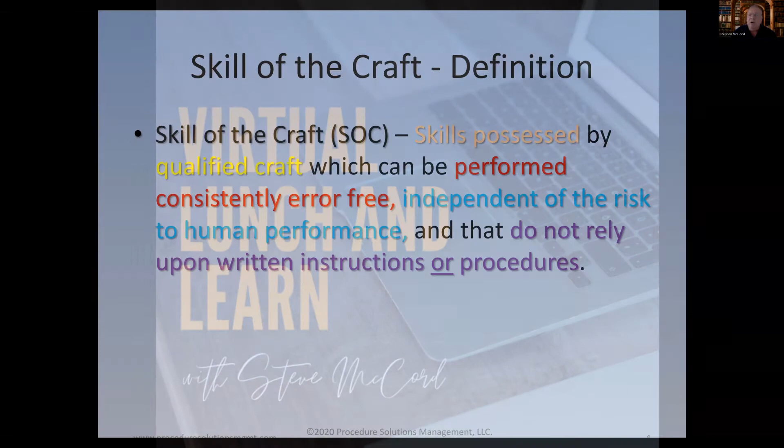We want to talk about the definition of skill of the craft. For many years in the nuclear industry, the way skill of the craft has been treated is many of the power plants in the country actually developed a skill of the craft procedure. And what they would do is they would have this huge document that lists every single task that was considered

to be skill of the craft. If you found that task in that procedure, then as a procedure writer or a job planner, you didn't have to pretty much provide the how. You could just tell them to go do that thing. And it was assumed that they would know how to go do that because it was their skill of their craft, right?

So what happened is that there's been a lot of problems in the nuclear industry with that, because if you go from power plant to power plant across the country, inspectors would look at these skill of the craft documents and they would find a lot of inconsistencies from one plant to the next. Although they all have pretty much the same training requirements and the same nuclear regulatory issues, so there was always this quandary about why is it different?

And sometimes it would be different between the same power plants that were owned by the same utility. Some utilities own multiple plants, but yet they could have a different thing from one plant to the next. So a few years ago, it was basically tasked to EPRI, the Electric Power Research Institute, and there was funding for it to actually come up with a definition for skill of the craft instead of this big book.

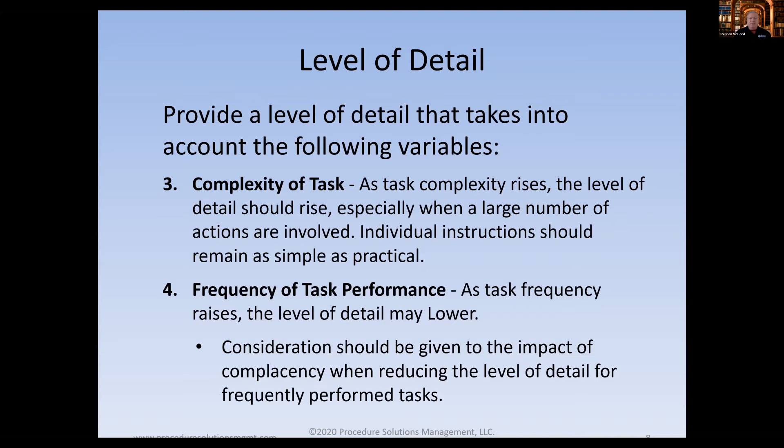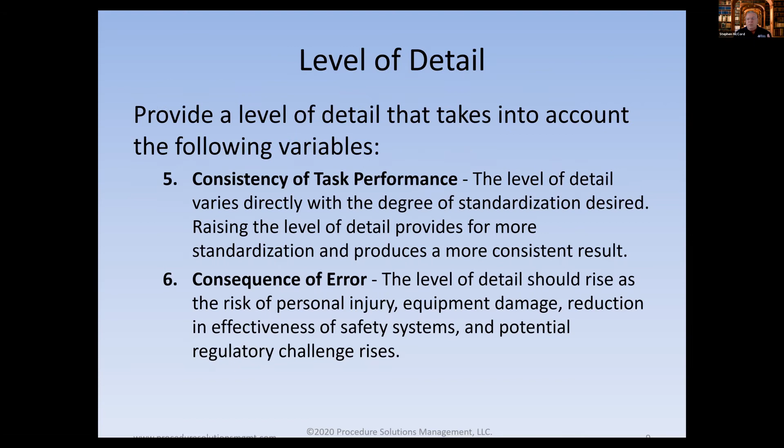And so in doing this, we really need to try to understand that when you look at skill of the craft, it's one of 6 considerations, right? I don't know how much I really impressed upon that in my classes that I teach. It's just one, right? But in of itself, skill of craft has its own definition here that is very, very important. And so it's very narrow on what you can do if you follow the industry guidance, to be able to do that.

I'm going to pause there for a second. So what we've talked about to this point is the definition of skill of the craft. And then what I tried to do is frame it so you could see where skill of the craft factors in with the 6 considerations that you need to take when you're trying to figure out, do I tell someone what to do or how?

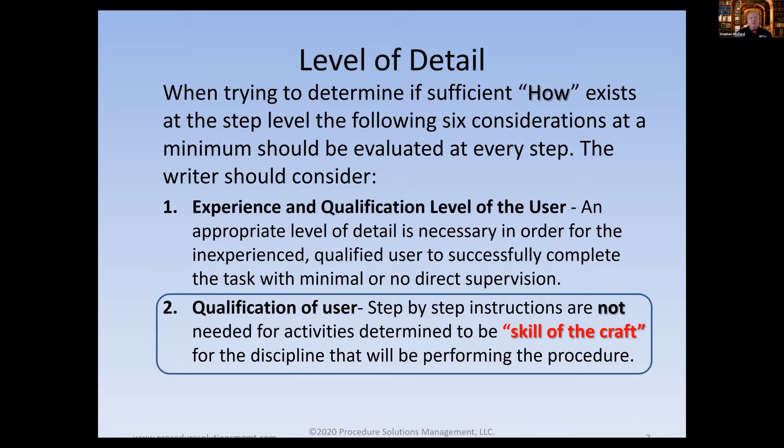So to truly understand the significance of skill of the craft when determining the level of detail, we must first fully understand why are procedures or work instructions important in the first place. You know what I mean?

I mean, sometimes if you look at some of the companies that we work with, you think that procedures are treated kind of like a necessary evil. I've found procedures where, I mean, what do? We do a lot of procedure upgrade projects. Right? Why am I doing that? Obviously, they haven't been kept up to date. There's not a lot of interest in doing it until something really goes bad.

And then all of a sudden now either with some regulatory influence, or maybe some senior management influence, all of a sudden now there's emphasis placed on we got to fix these procedures. And you can spend millions of dollars, sometimes depending on the extent of the condition. And so why do this in the first place?

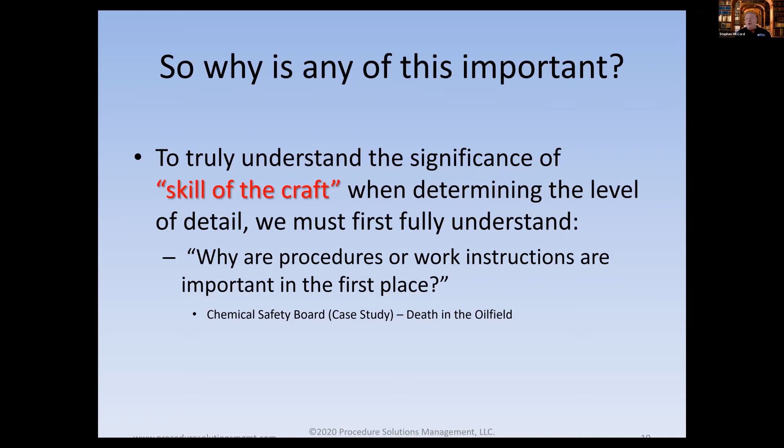And what I'm going to do is show you a really quick video on this. Look at this job, it was done in a remote area out down in Mississippi. But notice in this job, these guys pretty much killed themselves except for one person in there. And when they did this, notice how they were using skill of the craft. Although there was regulatory guidance that says you have to do these certain things, and they found the tools that they were needed to use that if they had used them probably would have prevented this, in the pickup truck at the scene, that weren't used, right? So look at this little video real quick.

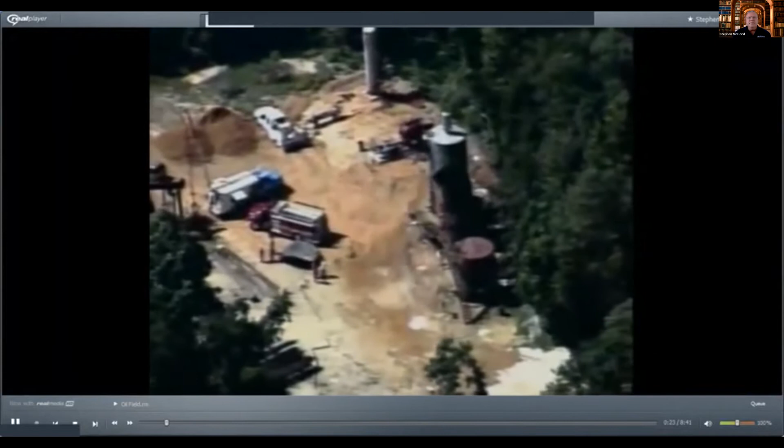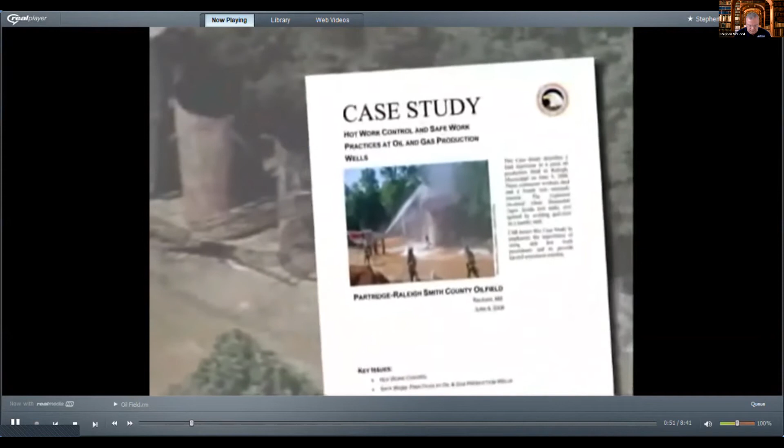June 5th, 2006, 3 maintenance workers were killed and a 4th was seriously injured in a violent explosion during a welding operation at a rural oil production field in Raleigh, Mississippi. The field was operated by Partridge Raleigh, a company that specializes in recovering oil from older, dormant wells. All the victims worked for Stringer's Oilfield Services, an independent contractor hired by Partridge Raleigh to install tanks and piping at the site. The CSB investigated and issued a case study calling for safer work practices in the oil and gas production sector, which has experienced a number of serious accidents. Our case study noted that the fatality rate within the oil and gas extraction sector was more than 8 times higher than the average of all industries in the United States. Well, we've been very concerned about safety in the oil fields for many years. In fact, this is the 4th case in which there have been multiple fatalities that the CSB has investigated. CSB lead investigator Johnny Banks says there are key lessons from the Partridge Raleigh investigation that apply to many industries, particularly concerning what is called hot work, such as welding, cutting, and grinding that can cause ignition. Workers should use extreme caution when performing hot work on any tank or container that holds or has held flammable materials. Their lives may depend on it.

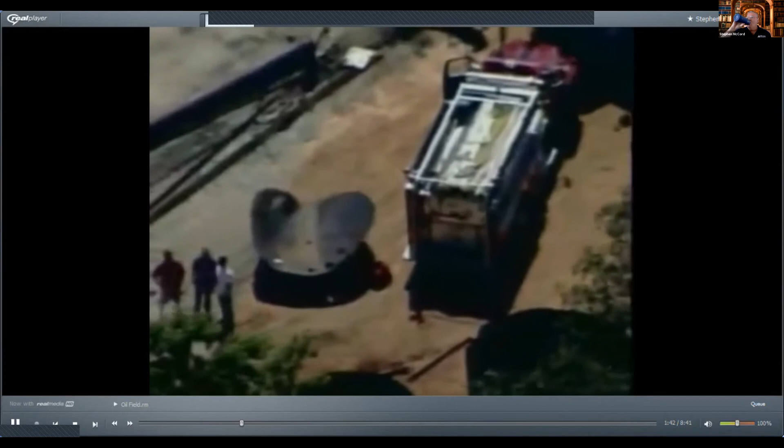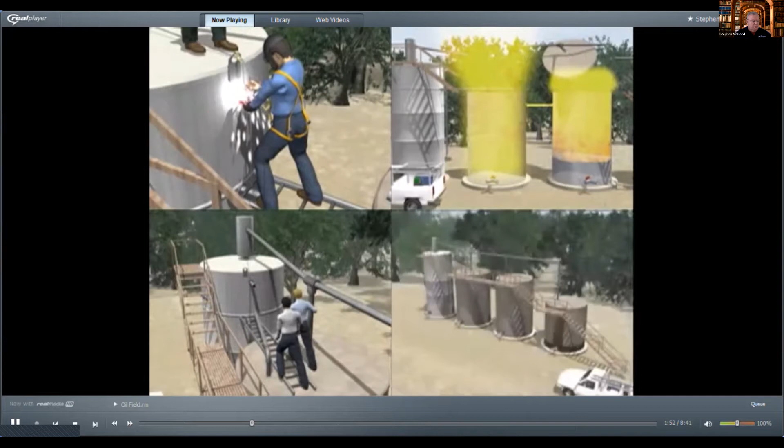The following animation shows how unsafe work practices and a lack of training led to a tragic loss of life at the Partridge-Raby oil field.

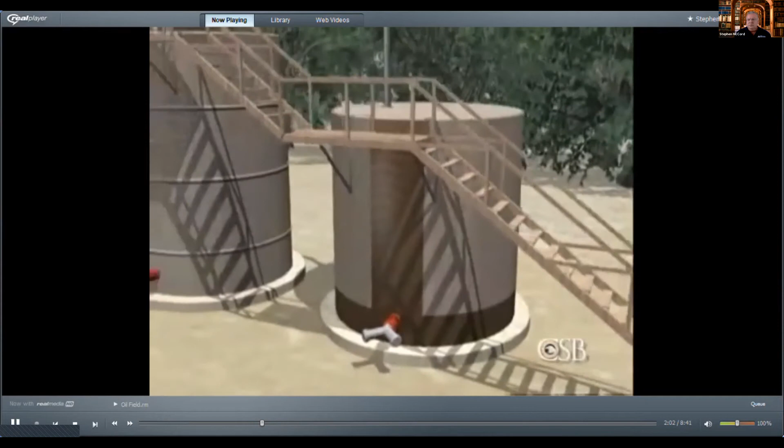The oil field had 4 tanks. One was for wastewater, two were storage tanks that held oil prior to sale, and a fourth larger tank, a so-called production tank, received oil from the well.

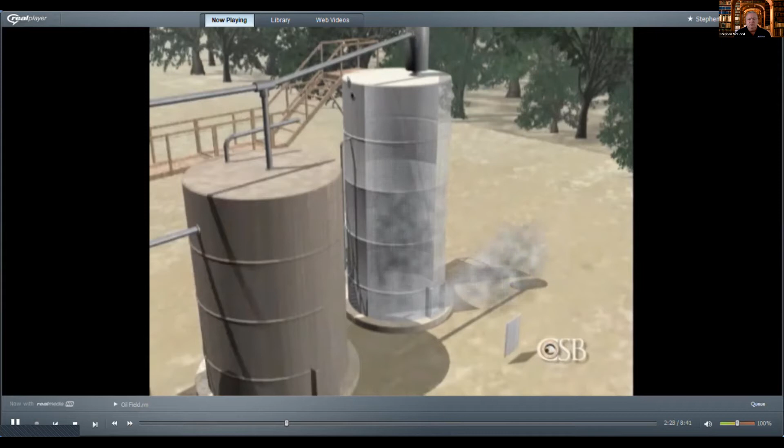A Stringer's Oilfield Services crew arrived and began work to connect a pipe between the large production tank and the nearest storage tank. To prepare for welding, contract workers removed the hatch from the large production tank to clean and air it out. They then checked for remaining flammable hydrocarbons in the tank by using an unsafe and unreliable technique, inserting a lit oxyacetylene torch to check for a flash from ignition.

The big tank was in fact empty, but crude oil remained inside one of the storage tanks, warming under the morning sun. Unseen by the workers, flammable vapor from the crude oil was flowing from that tank into the other storage tank through an overflow line, and then out into the atmosphere through an uncapped 3-inch pipe. This open pipe end was just 4 feet away from where they planned to weld.

In order to provide a platform for the welder, a ladder was placed horizontally between the two tanks. To stabilize the ladder, two workers stood on top of one end. A foreman observed the work from atop the production tank. The welder, who was perched on the ladder but wore a safety harness secured to the tank, began by making two small welds to a pipe fitting.

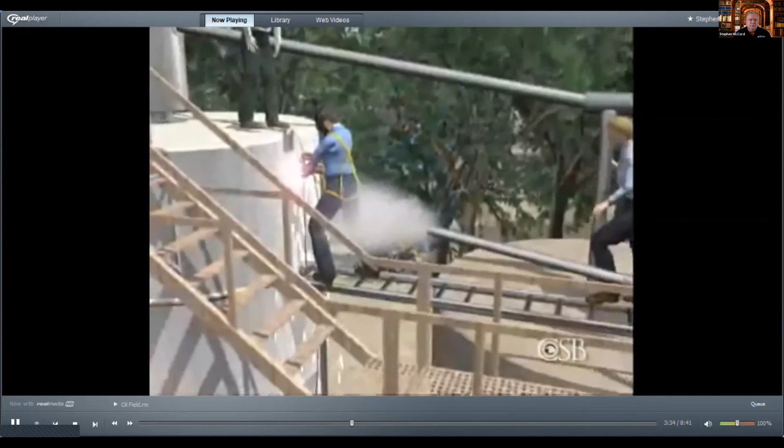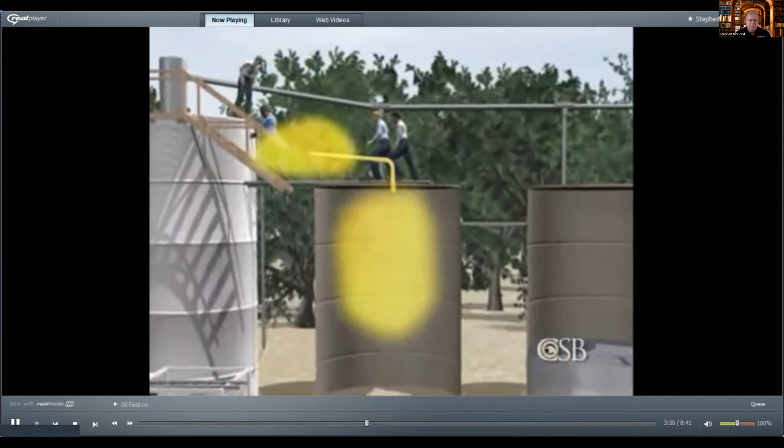Sparks showered from the welding process, igniting the flammable vapor that was escaping from the open pipe end. Flames flashed back through the open pipe into the storage tank, causing an explosion which blew off the tank lid and the ladder that 3 of the workers were standing on. Flames shot through the overflow pipe into the next tank, causing an even more violent explosion from the flammable hydrocarbons inside and blowing its lid off as well.

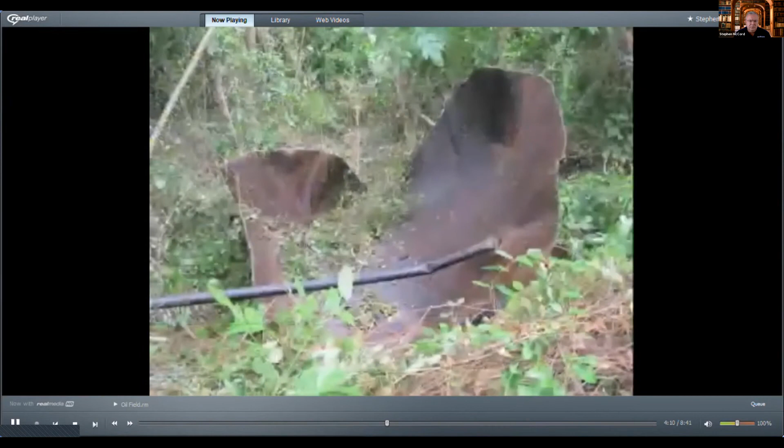The first tank lid flew a distance of 50 feet. The other traveled 750 feet through the air. Two workers that were standing atop tank number 3 and one that was standing atop tank number 4 were blown off by the force of the explosion. They suffered fatal injuries as a result. Only the welder, who had been wearing a safety harness, survived, but he suffered a broken hip and ankle.

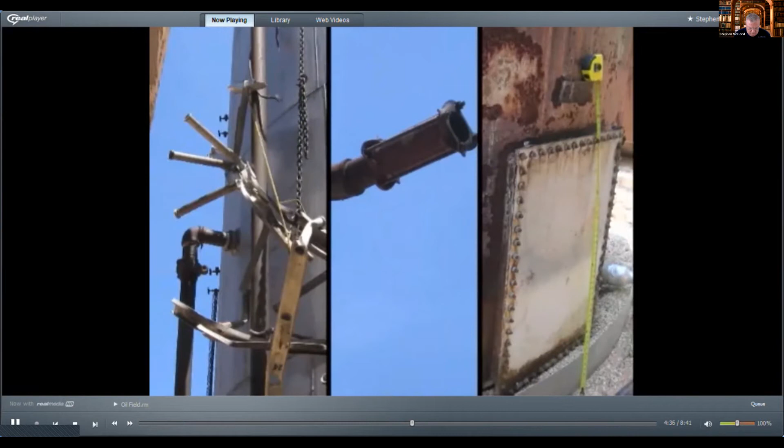The CSB investigation identified several unsafe work practices that contributed to the likelihood or severity of this accident. Prior to welding, workers only tested for the presence of hydrocarbons by inserting a lit acetylene torch into the production tank. Not only is this dangerous, but it's not a good way to check for flammable vapors.

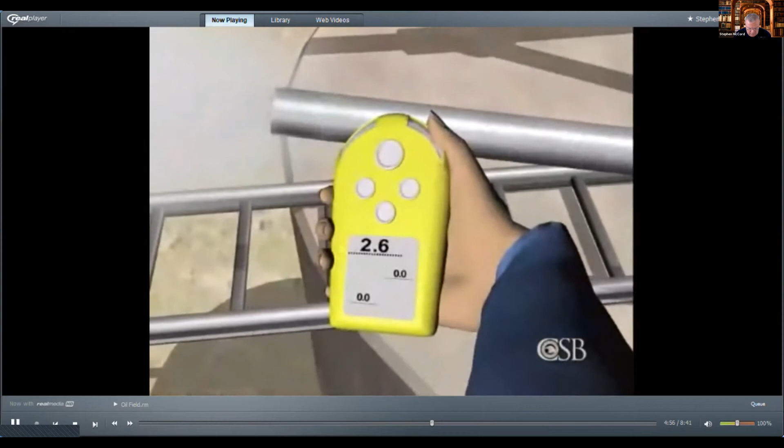The workers did not use a flammable gas detector to test for vapor, which could have warned them that dangerous vapor was flowing out of the open pipe near where they planned to perform welding. Another unsafe practice was not capping the open pipe, especially important since all the tanks were interconnected, and one contained a significant amount of crude oil.

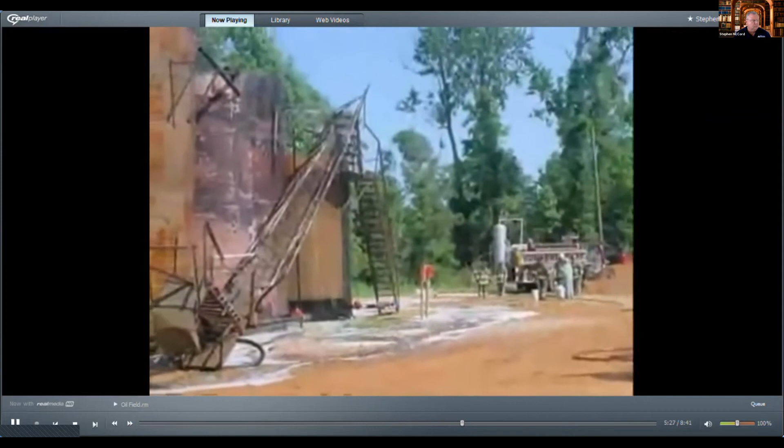This case is a reminder that we need to look at hazards in the area around where we're working, that equipment that may be nearby that isn't directly involved in the job that you're doing, such as welding, can have deadly consequences if you don't address the hazards.

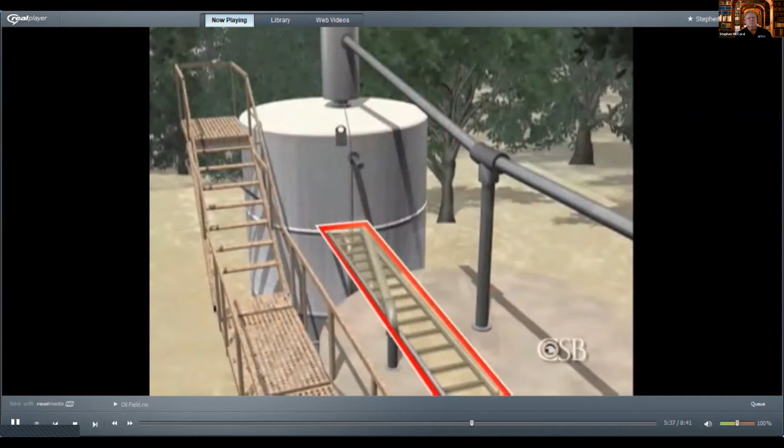The CSB report also noted that the use of a makeshift work platform, the ladder braced by workers standing on top of the storage tank, unnecessarily put these two men in harm's way. They died when they fell from the exploding tank.

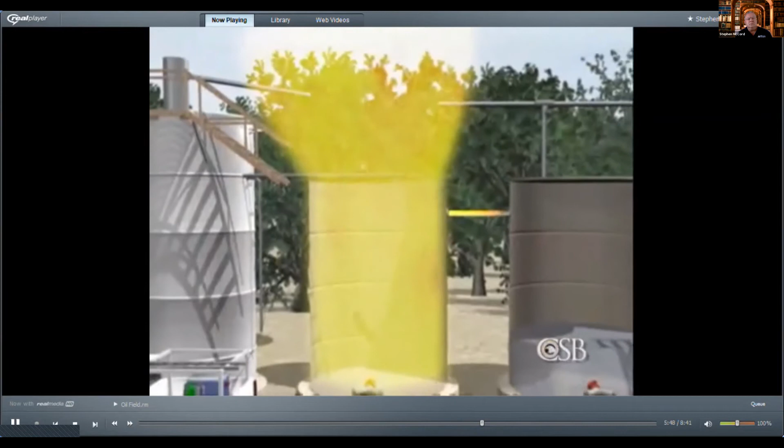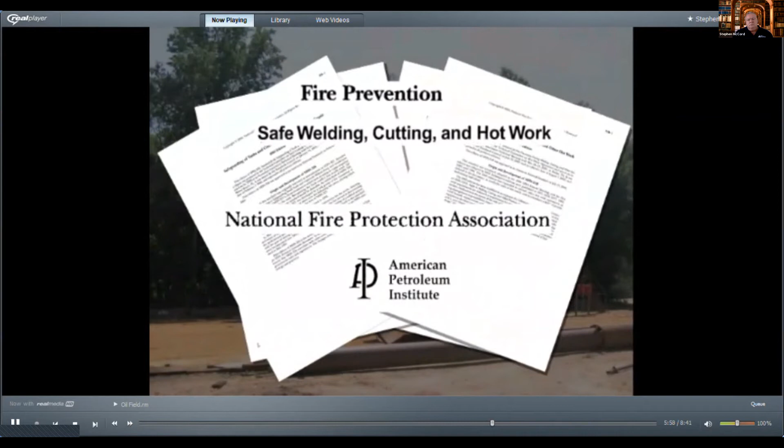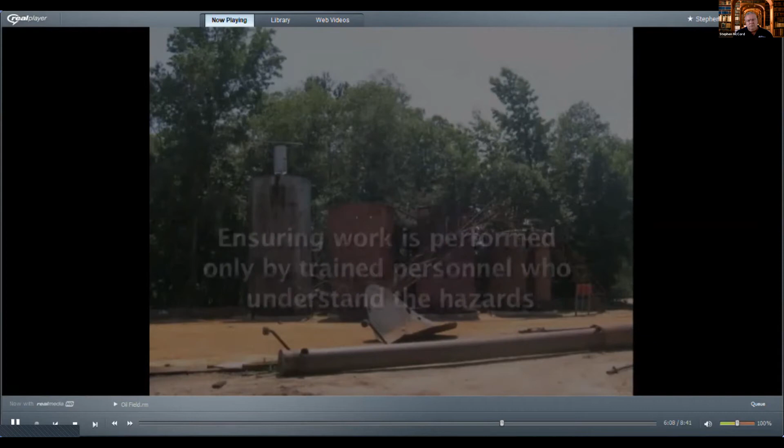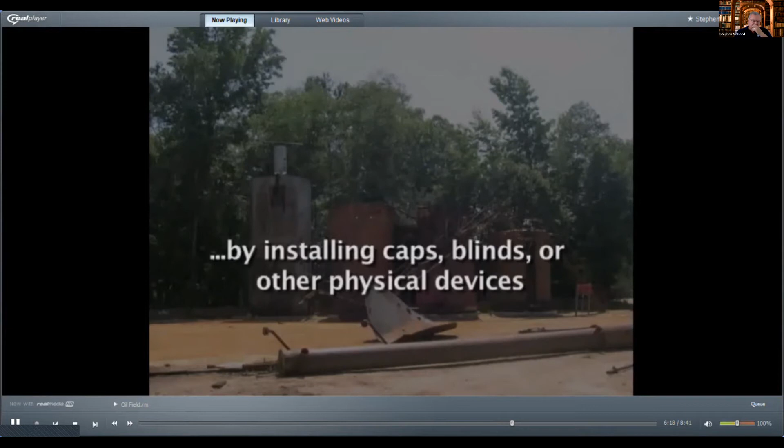The American Petroleum Institute, the National Fire Protection Association, and other organizations provide guidelines for safely performing hot work. Safe practices include issuing written hot work permits, ensuring work is performed only by trained personnel who understand the hazards, isolating areas where hot work will be performed from piping or tanks that contain flammable or combustible liquids by installing caps, blinds, or other physical devices, and using a gas detector to test for a flammable atmosphere before and during work. Oilfield work can be extremely hazardous, and that's why training and procedures to do jobs such as hot work and welding are absolutely essential to avoid tragedies like the one in Mississippi.

Steve, can I ask a question? Please do. So that last video, just from years of working in nuclear power too, do they not do pre-job briefs? Do they not discuss the hazards? I mean, I guess...

Dave gets upset if we light anything in the garage near the lawnmower.

So I guess I'm just kind of, I don't understand, the thought of going up there to do that without knowing it's flammable. Yeah.

OSHA requires pre-job briefs, basically a job safety analysis, JSAs, some people call them JHAs, job hazard analysis, before performing work. As you can see, even in this example, they were very complacent. They cut corners, and you could actually see the leadership. The supervisor was actually on that tank, and he died also.

So he pretty much condoned the workarounds or the poor work practices. As you can see there, they were doing everything from what I would have called skill of the craft. They had, I'm sure, installed many of those tank assemblies at different well heads, Mississippi and other areas, and they've gotten to the point where their complacency led to their demise.

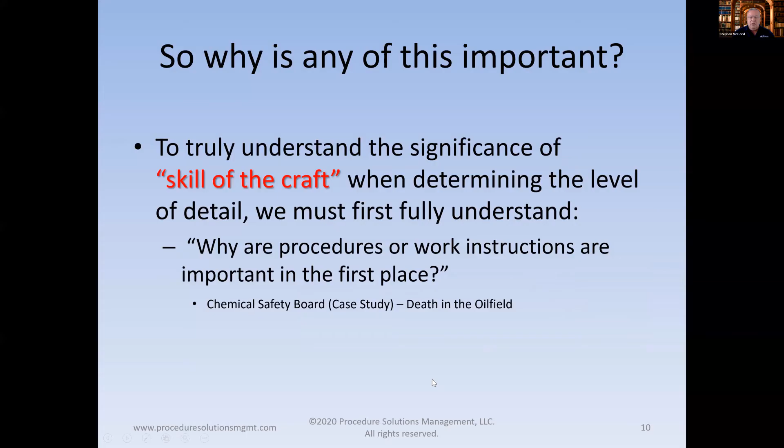So I know some of you have been in my classes and you've probably heard this and thought, oh my God, Steve, you're gonna do this again to me. Yes, I am, right? The whole thing, I had this epiphany about skill of the craft when we were helping develop that definition for EPRI. We had the contract to actually do that. When you look at this, when any of us performs tasks, we have these performance modes that we move through. For some of you who haven't been in my classes, this is new, and some of you have, but it's really worth repeating again.

So what happens is when we as human beings are performing tasks, there are 3 performance modes that we move through. And you can Google this, you can find all kinds of stuff on Google about these performance modes, and there's even videos on this stuff, which I'm not going to show here today. But the point I'm trying to make is, in the 3 performance modes, I'm going to slip to the next slide. The 3 performance modes are defined as skill-based, rule-based, and knowledge-based.

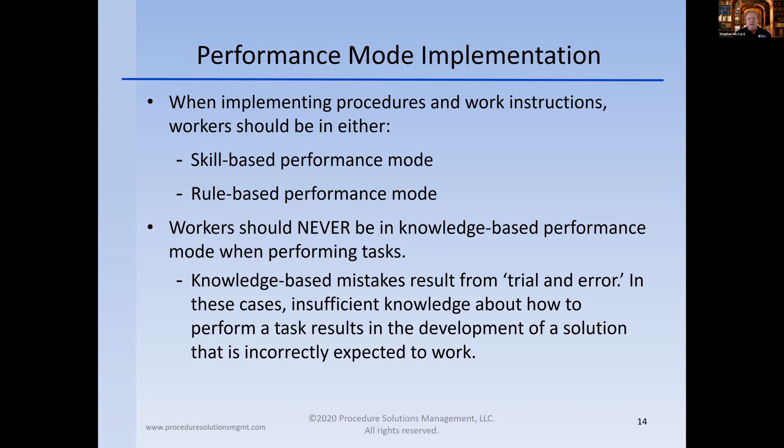So when you look at this, when implementing procedures and work instructions, we want to make sure that workers are either in the skill-based or rule-based areas. Workers should never be in knowledge-based performance mode when performing tasks. Knowledge-based mistakes really result from what they call trial and error. In these cases, insufficient knowledge about how to perform a task results in the development of a solution that is incorrectly expected to work, and then they have the failure. Ultimately, when we're writing procedures, the goal of what we're trying to accomplish is to manage knowledge-based performance. Now, why bring this up?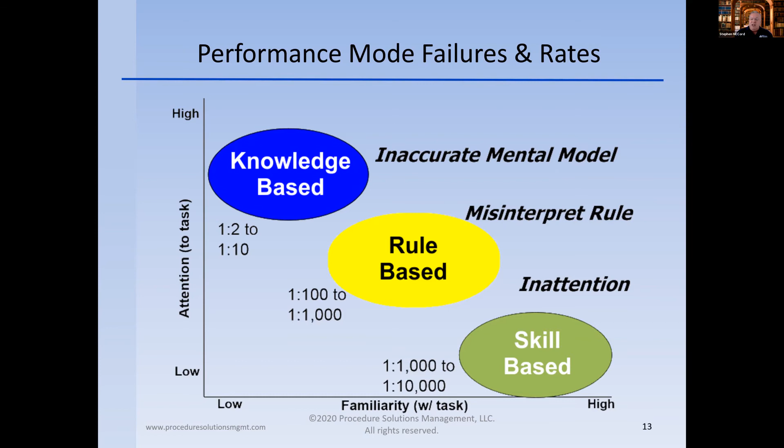What I'm trying to get you to do is really look at your risk, because a statement like that moves you into this knowledge-based mode of 1 in 2 to 1 in 10. Are you okay with that? If you go back and look at the 6 things of level of detail - consistency, frequency, consequences of the error, and the others - if you look at those collectively, maybe it's okay to have it written that way, because overall they train on this and the consequences are low. But you have to talk your way through it. You just can't cut and paste and put a step in there and say 'verify plant operation stable' or 'verify there is sufficient level in the deionized water storage tank.'

What's sufficient, right? And then they come out and say, oh, by the way, the level indicators are available on the tanks. Well, that's great, I'm glad you shared that with me, but it still doesn't tell me what sufficient is. Am I supposed to know that? Maybe I am, but as a writer, you guys got to ask the question. You just can't write a step like this and pass it through the review cycle and expect everybody to sign off on it. Anybody that reviews a procedure is doing it as a collateral job most of the time, and it's always after work hours because they have no time. So you're always worried - I've seen procedures like this go all the way through the review cycle, get out in the field, fail almost instantly, and we have to do a revision.

Verify the cooling water return valve to the suction of each deaerator supply pump is open - 3 valves. Well, is there a valve number? Is it obvious that these valves are there? If they are, then fine. But you know what I mean.

Then look at this other one. You're starting something: before starting the pump, check the direction of rotation. Also verify the proper bearing lubrication and the stuffing box connections. Does it tell you what type of oil it is? Does it tell you what they're talking about? Be sure the casing and the suction lines are primed. So here you have multiple actions in a paragraph, and it's all written vague and open to interpretation.

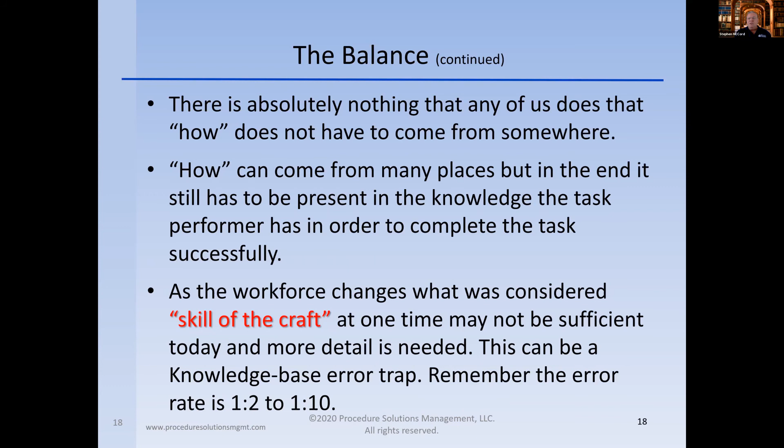So I'm going to pause here for a second. What this part of the training I was trying to give you is the fact that when you're looking at this, you got to remember that when you're in knowledge base, you have an error rate of 1 in 2 to 1 in 10. Sometimes you may not perform that job 10 times your entire career. So you got margin. Sometimes you're going to do it more frequently than that, and then next thing you know you're really getting narrow on where your risk is.

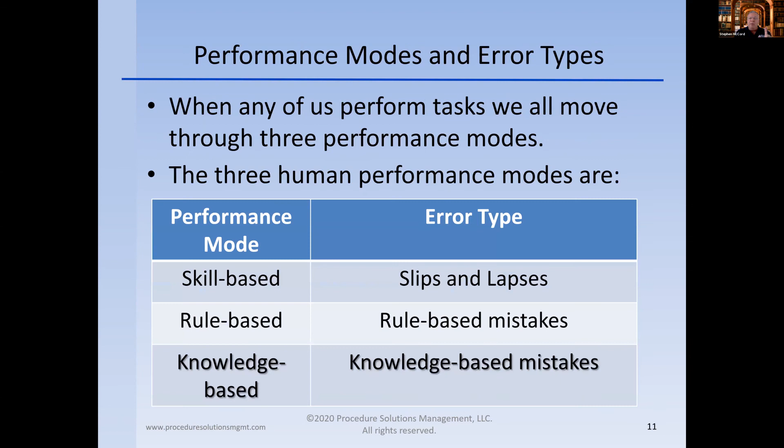And what happens is, I don't think people get it at times when I talk to them in my rounds from plant to plant, is that skill of the craft and knowledge-based performance are really one and the same. That means skill of the craft has a potential error rate of 1 in 2 to 1 in 10. That's why when you go back and look at what EPRI did when they wrote the definition, they said, you got to be able to perform this consistently error-free, and that's why they added independent of the risk to human performance. That's why they threw that little buzzword in there. Also, notice they said it's going to be independent of written instructions to be able to do that.

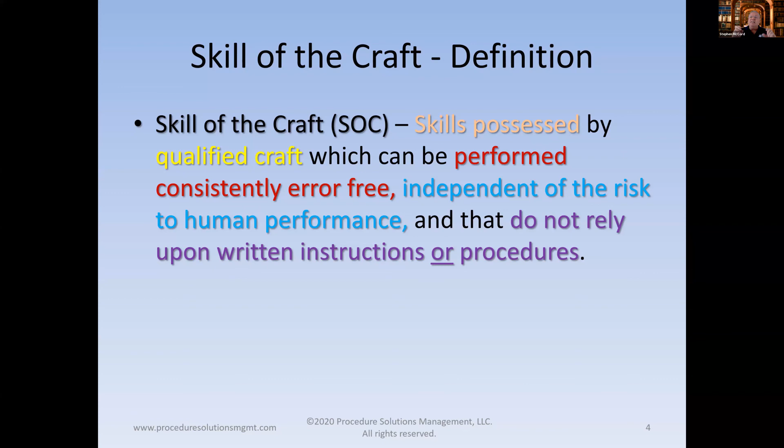So when you think about skill of the craft and you're trying to figure out, well, can I write what to do or do I need to write how? You can write what to do. I'm not trying to tell you not to do that. It's just that every time you put one of these statements in there, like this one did, where it says verify that there's sufficient level in this water tank - how do they know? Are they trained on that? Is it part of their basic operator qualifications? If you feel that's knowledgeable, maybe the level indicator on the side of the tank has a high and a low on it, and it's painted right there.

All right, well then you're okay, you're all right with that. But sometimes that means you have to get out of your cube and walk out in the field and check this thing out. You just can't do it from where you're sitting in your seat. Now today is particularly hard because almost all my staff is working from home. We don't have that, where you can ask that question. We got to ask someone in the plant that's there running it to go out there in the field.

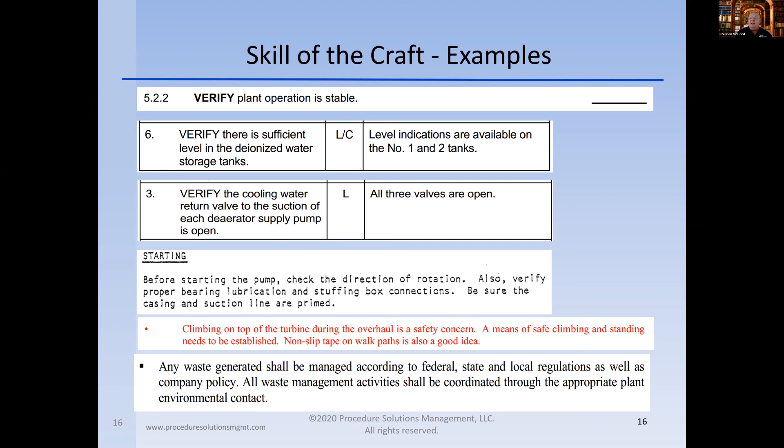Any questions before I get into the conclusion piece? No, we're all good. All good?

Okay, so in conclusion, skill of craft is knowledge-based performance. It comes with an error rate of 1 in 2 to 1 in 10. Every action step consists of 3 parts: the who, the what, and the how. You have to remember how has to come from somewhere. Do not fall in the trap of making an error carried forward by cutting and pasting. Remember, skill of craft is defined as the skills that someone has. They're qualified to do their job by some qualification process. They got to be able to do it consistently error-free, independent of human performance risk, and it doesn't rely on written instructions or procedures.

Now you got to remember to emphasize, perform consistently error-free and independent of human performance risk. It's big. You've got to remember to use the other 5 levels of detail. There are 6 total, which includes skill of the craft, but the other 5 help you make this determination. Like, what about their experience and qualifications? What about the complexity of what they're doing? This is a simple task.